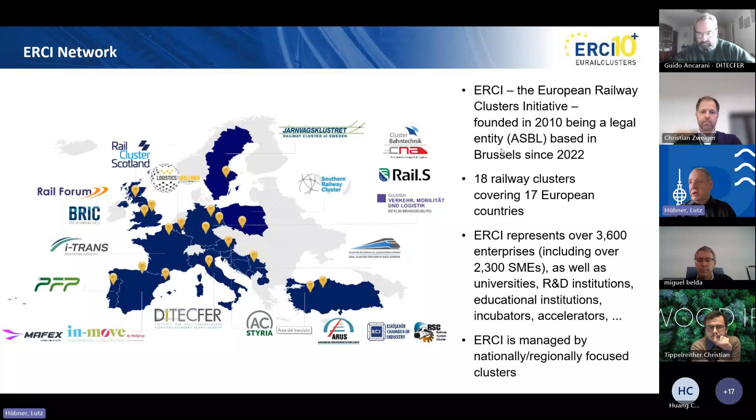Talking about the services of ERCI, mainly to the majority of the members of the ERCI clusters, which are small and medium-sized enterprises, there is the partner matchmaking in research and development activities, exploring new market opportunities also outside the own region within Europe but also outside Europe, enhancing visibility on international level, and discussing innovative topics which may have an impact on the development of the future rail system, like cybersecurity, multimodal and logistics, green and sustainable mobility, human factors, and so on. ERCI is also giving some networking opportunities, for instance due to one of the webinar series, and this is one webinar of that series.

Normally we have at least one webinar a month. We are also preparing and conducting workshops and networking events. We are present at fairs and organizing business clubs. The yearly event of ERCI is the annual ERCI Innovation Awards, a competition where every member cluster can nominate up to 3 applications to the European contest, and the next awarding ceremony will take place in 2025 during the Expo Ferroviaria in Milano.

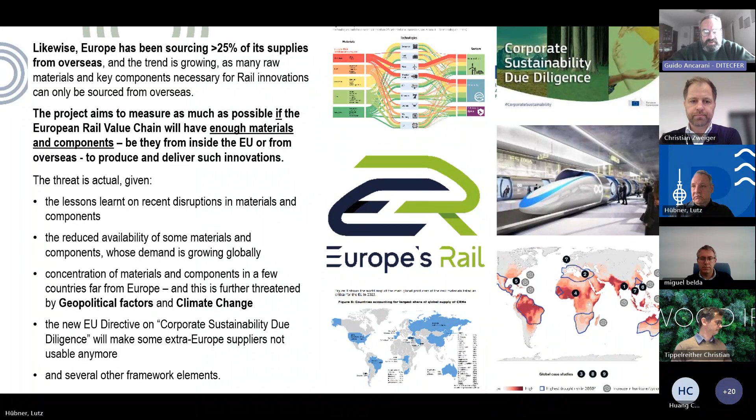So in order to face this, we have proposed to Europe's Rail a project, Leader 2030, coordinated by ERCI, using the 18 clusters on the field, knowing which problems come from the rail supply chain locally, and being able to face those problems and try to find solutions in terms of disruption and try to avoid them.

The composition of this project is 4 partners: ERCI, as I've said, but also Railenium, the technological center in France, JKZ, the cluster in Saxony, the cluster of mining, and Technopark Istanbul, able to help us defining the needs from other sectors in order to understand where and how rail is positioned in this problem. So we have 5 work packages in our project.

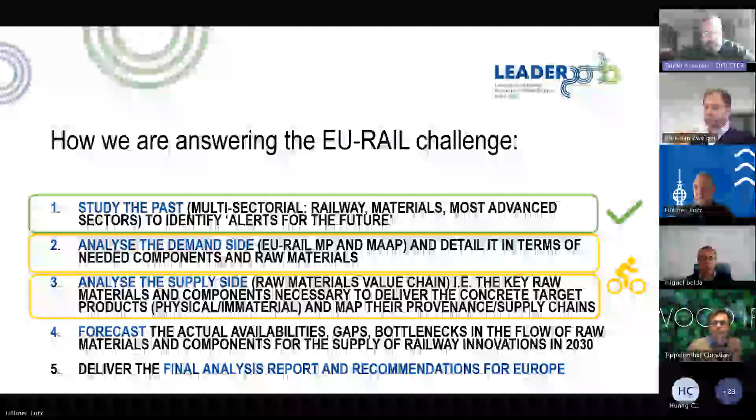Just to give 2 examples of what we are dealing with: one is additive manufacturing, certainly already ongoing, not something new, but a way to become a bit more autonomous in the manufacturing of product, subsystem or system. And the other is composite. Certainly, substitution of material is another way to be more resilient.

This ends the presentation on Leader 2030. I invite you, as you have seen already in the chat, the connection, or you will see it. In the chat you will see the way to reach us in order to have some contribution or to continue the discussion on this project.

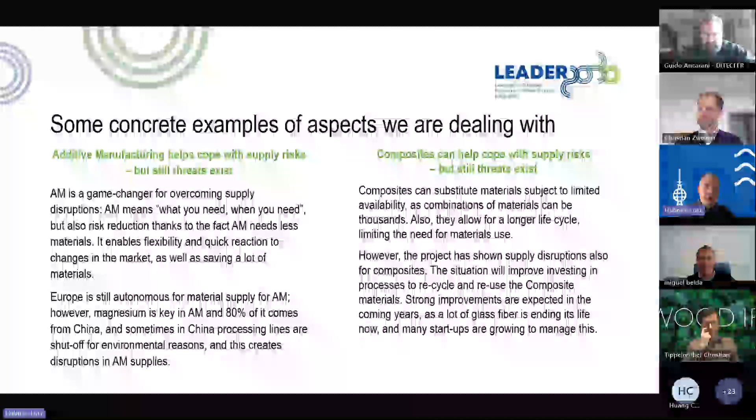Thank you, Guido, for this interesting presentation of the LEADER 2030 project. I will immediately hand over to my colleague Christian Zweiger from AC Styria. He has the task to introduce the first presenter.

Thank you, Lutz. Thank you for having me. Christian Zweiger, representative of AC Styria Mobility Cluster, one of the 18 clusters Lutz mentioned in his introduction. I am proud and happy to introduce Christian Tippelreither of Weitzer Wood Solutions, a long-term, mostly R&D partner of ours concerning automotive, but as might be interesting for most of you, also rail systems. Without further ado, I'd like to hand over to Christian. Lutz, thank you very much.

Good morning, everybody. Thanks to be here, and I'm glad to present our company and our technology to you all over Europe in the railway sector. Lutz, I think I can share my presentation. Yes, perfect, it's now working. Thanks everybody for being here and to present our technology.

In the previous statements, we also mentioned some points regarding sustainability, and I see some wording also regarding wood as a raw material for new applications. This makes me very happy, because we from Weitzer Group, a traditional wood company, have in our mindset committed to find answers made out of wood.

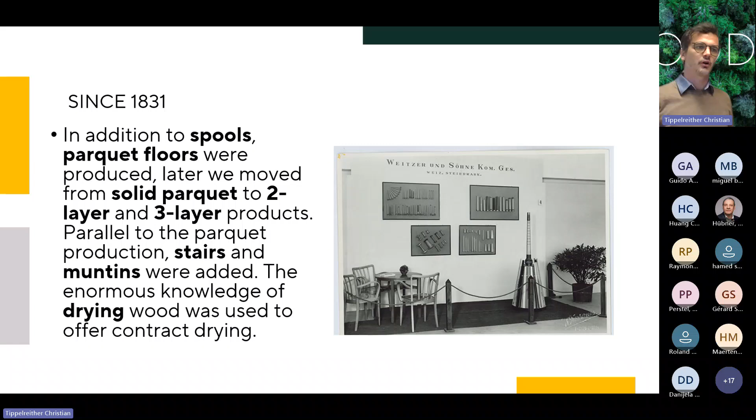And with this knowledge, with this very huge backbone behind us, we now look very close at what we can do with wood in a new way.

In our mindset, the raw material has a broad variety and a broad benefit, especially in Europe. Maybe one of you knows the CO2 storage of 1 cubic meter of wood is about 1 ton of CO2. So it's quite a big amount when you use wood in applications to store the CO2 in the product, whether it's in building, a mobility part, or something else.

Especially when we look at our region here in Austria, or even in Germany, Switzerland, Italy, Spain, the Scandinavian area or the Eastern area—everywhere in Europe, wood is rich in the region. It's there, and we say it's one of the only really renewable materials with a very huge amount of material in our industry area here. So we see it as a quite big advantage for the European industry to use wood, because we know what we can do with it.

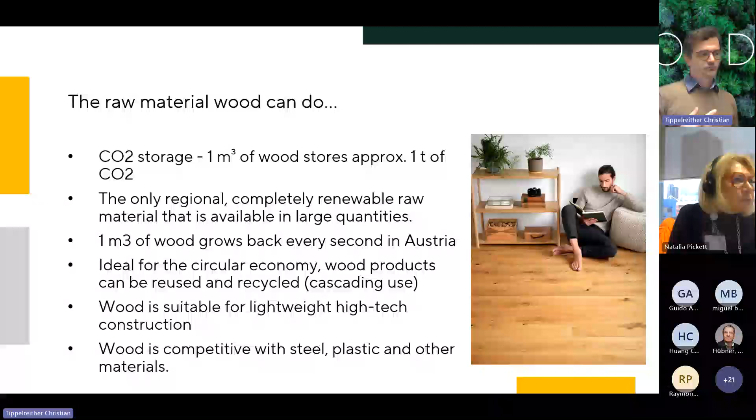We know the industrialization part, and we have the material as a renewable material in our region. Especially in Austria, 1 cubic meter of wood grows back every second. So it's ideal for using in circularity usages—can be reused or recycled in a cascade usage—and is also very good in sustainable lightweight material and lightweight solutions. I'll explain what I mean by this afterwards.

As Weitzer Wood Solutions, you see here an impressive amount from our side—we are committed to finding answers out of wood, especially with the technology of pressing it in molds, pressing 3D layers or form parts out of veneers. So the challenge we have in Austria is that we are in a big transformation phase.

When we look over Europe, we now have the chance to transform our businesses from fossil-based products and fossil-based solutions—whether fuels, materials or something else—into green business solutions, into circularity solutions, to recycle the products, to make the energy usable from the sustainable part, but also the materials we have in a sustainable way for new business drivers.

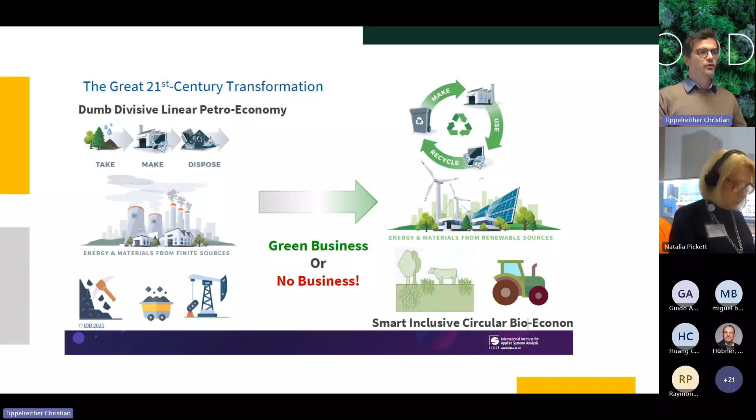And that's the reason why we are really focusing on our path to be an engineering and manufacturing company. We say it's for wooden hybrid components. Wooden hybrid components means we combine different wood species together to create a hybrid product, or we combine different materials together with wood—whether plastic materials, steel, or something else. So we have technologies to combine different materials with wood and to make the best out of each material.

Therefore, we deliver a 5-phase process where we start with the customer in the engineering phase to find new ways, new solutions, and bring it to a producible part—to industrialize the part and produce it up to 1,000, 10,000, or 50,000 pieces every year. In this way, we are certified with ISO 9001, but also 27001, and also quite familiar with certificates regarding burning issues and so on.

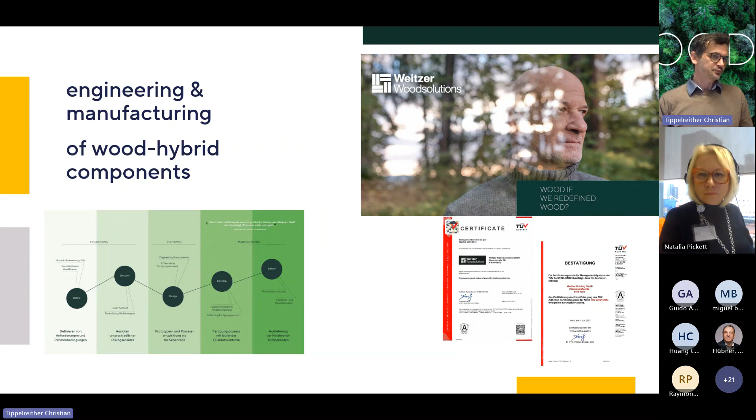For us, it's really important to find new ways in designing with wood. Wood is a high-tech material. Wood itself is a composite material, a natural composite material out of cellulose, lignin, and hemicellulose. So I have a fiber with the cellulose, and also a matrix material with lignin, and a gluing system with the hemicellulose.

So when we use this wood as a design material to find new ways, new ways regarding material databases, to simulate this and bring sustainable design solutions with the backbone of the data simulation part, it brings new engineered solutions and results in customized, optimized wooden composites for the whole industry.

The main backbone behind this technology for us is the point of predictability. In our research program, we worked really closely together with different partners from industry and also from the research point of view—the TU Graz, the BOKU in Vienna, or the Virtual Vehicle in Graz, which are our simulation experts in this case. And we found a way to make wood as a material predictable in a finite element modeling system in our simulation programs.

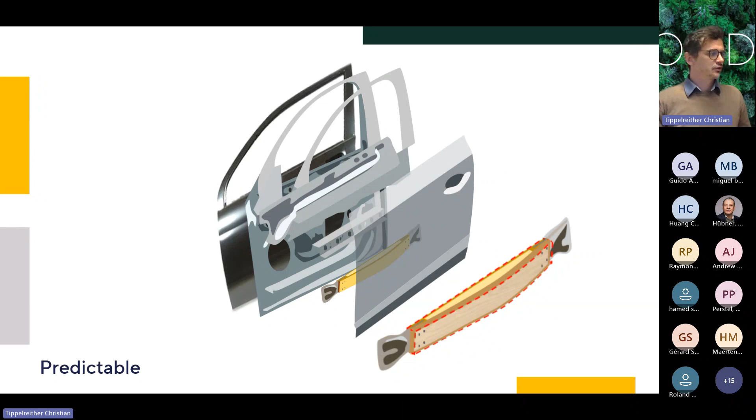With different use cases here, shown as a side impact beam in a car, we delivered the whole system from the simulation models, the digital simulation point of a product. Here in this case, it's a side impact beam from a car, and we make sure that this simulation part, these simulation programs, and the material data behind them function the same in reality as in the digital way.

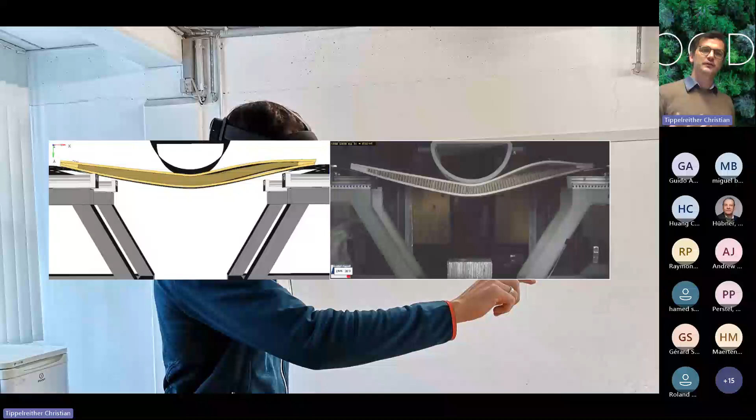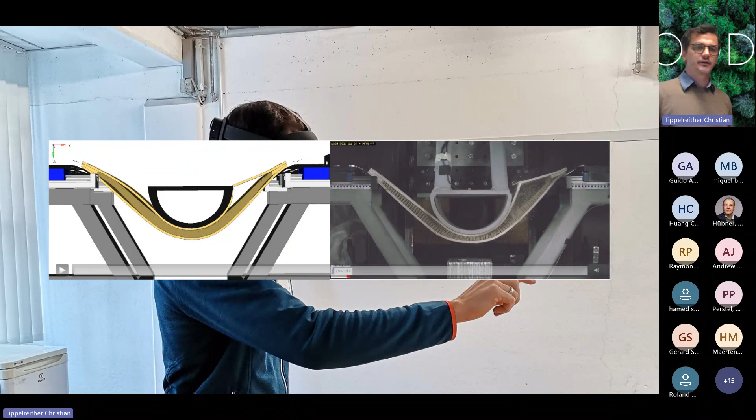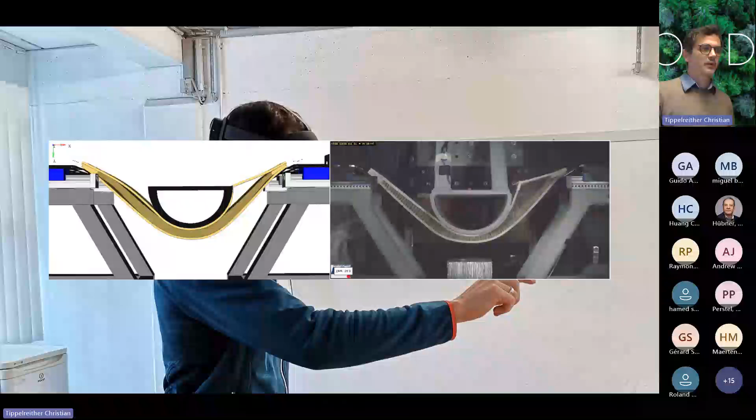That's the main game changer for us, that we're now able to bring crash-relevant simulations and crash-relevant material data to new applications, finding a way to optimize products that are generally steel profiles, small high-stiffness steel profiles, and build up natural-based solutions instead. That's why we always talk about producing lightweight parts out of wood.

That's also a bit of the explanation regarding the theory, when you look at some Ashby maps comparing density to stiffness. Technical experts know ceramics, metals, or composite materials are quite high regarding stiffness. Natural products have a quite broad variety regarding stiffness and density, but when you look at wood with a zero fiber angle, it has quite good performance regarding stiffness compared to density, because of much lower density compared to other products.

When we use this benefit of the zero fiber angle with good performance from the stiffness and strength point of view, and look at the detail level of which wood species fit best, birch or beech are quite good wood species for this veneer technology. Using thin veneer layers gives quite good stiffness and tensile strength with low density compared to other materials.

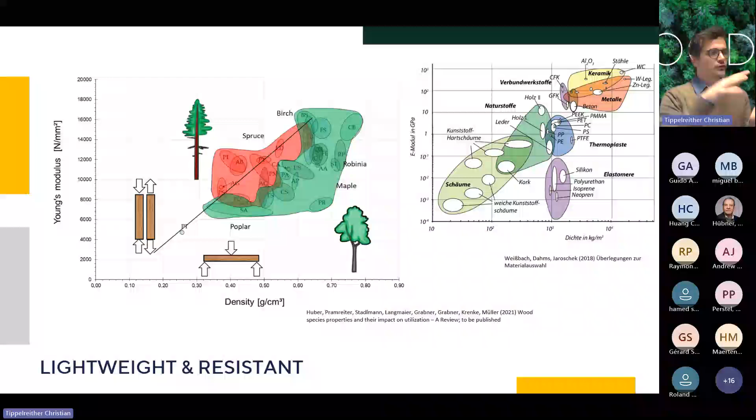That's the reason why in most of our product developments we achieve 10, 20, or sometimes up to 30% less weight, so we can produce lightweight components compared to glass fiber reinforced composite, or even aluminium or magnesium. We're on a good way to produce these 3D pressed parts, incorporating a resin system.

This resin system for gluing the thin veneers can be polyurethane, formaldehyde-based systems, bio-based systems, or even rubber-like with high flexibility. It mainly depends on the function which customer or product needs, especially in the railway sector, which is a big focus for us. Of course there are limitations regarding burning issues, but several resin systems work well, and we have certificates for some products.

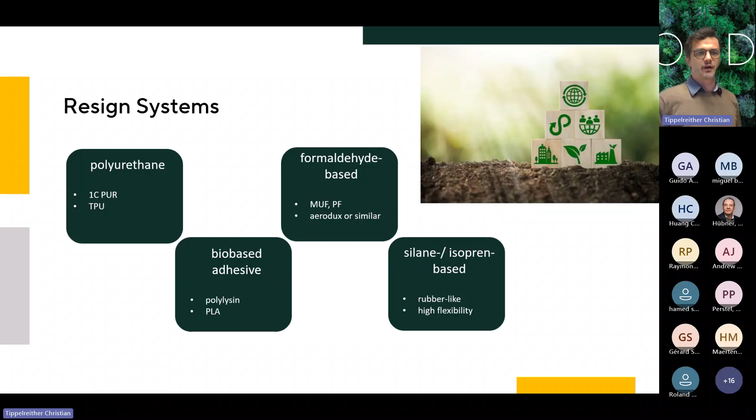For us, two digital processes are very important. On one hand, the digital engineering process, developing specifications with the customer, the functions of each product, setting up designs, simulation models, FEM simulations, and optimization loops. At this stage we also link to the production process regarding costs, setting up a cost perspective even within these optimization loops, finalizing first concepts for prototyping.

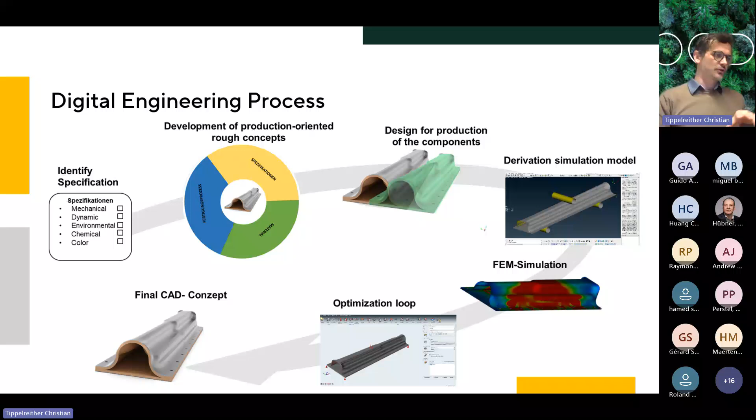Especially during optimization and design phases, the production process is very important to us - from raw material to product, understanding this function-oriented process control from the veneer layers, the gluing system, and optimizing fiber mats, if we use viscose fiber or similar to enlarge stiffness or strength of the parts. We bring digital product development and digital process development together in an optimized way.

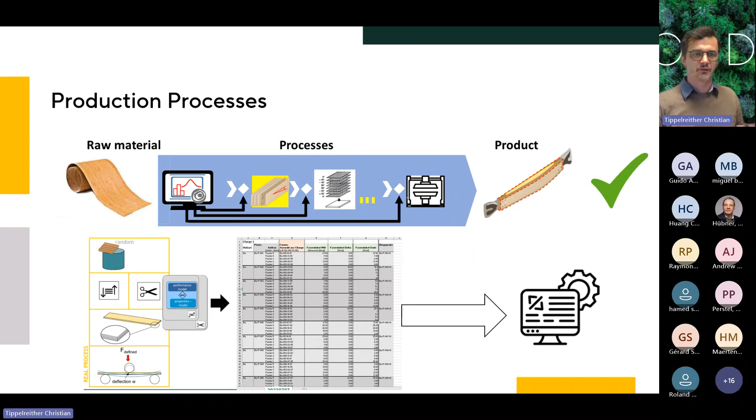We are even not allowed to talk about it, especially for the mobility sector, but this shows us the point that with use of wood, you can get a highly optimized part regarding weight, and also optimize the CO2 equivalent in your whole product, in your company, and store this CO2 in wood products.

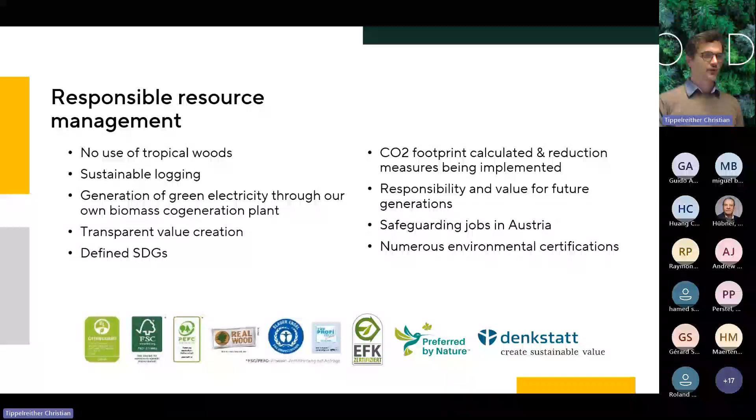In general, when we look at the mass timber species and the main sourcing of the companies, we look at it in Austria and also in Germany. But here in Austria, for example, the forest in general is changing from spruce to maybe more beech or also birch wooden species. So this is the reason why we also look at this, I would say old, but for the usage new, wooden species regarding beech and birch for these veneer production fields.

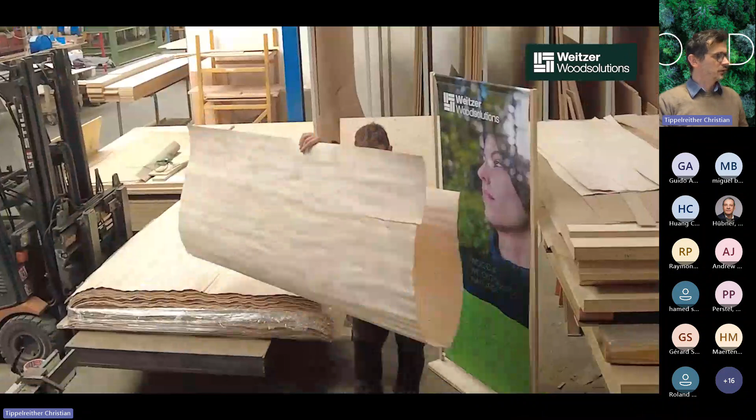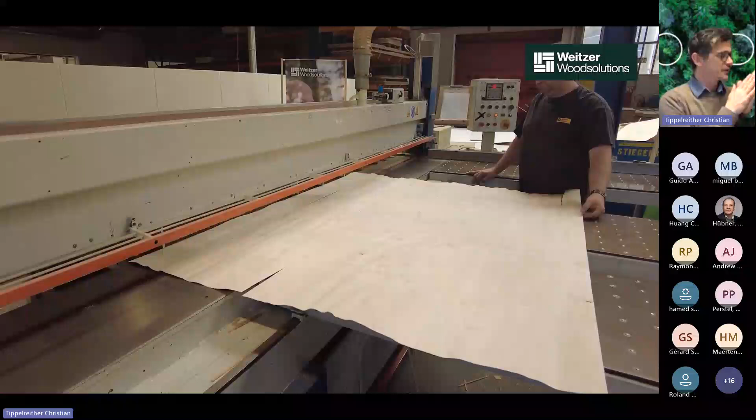Now, hopefully this works, a small video on the manufacturing, handmade working processes, how we use thin veneer layers, cutting these thin veneer layers, similar to carbon fiber production where you have a pre-preg. We have these thin veneer layers which are glued with different resin systems, and these glued thin layers are stacked together depending on the whole simulation model of what we need. It's similar to carbon production.

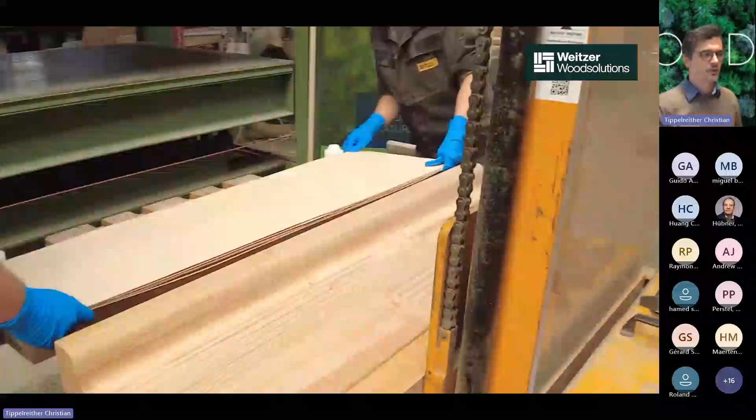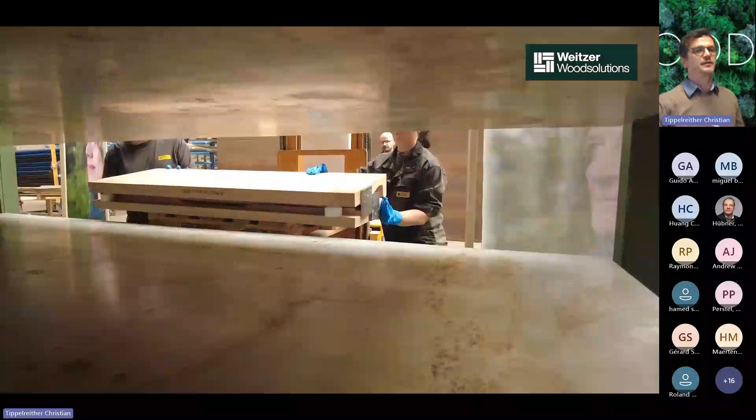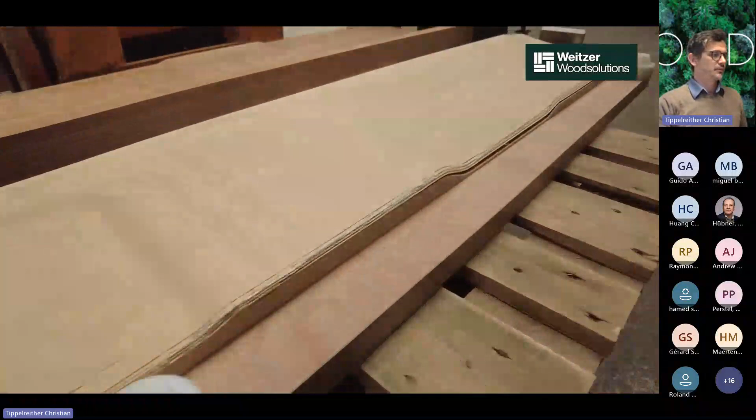You also have different layups, from 0, 90, or 45-degree layups with different pre-preg stiffnesses, and it's the same here, only with wooden veneer layers we use 1 millimeter in thickness or 1.5 millimeters, or thinner if needed. We press it in a pressed mold, depending of course on which glue you need, and then it's demolded. Then you have, as you see here, a complete pressed part in a 3D layer shape, as needed for our customer, for our purpose, and so on. Then it's quite similar to any other product.

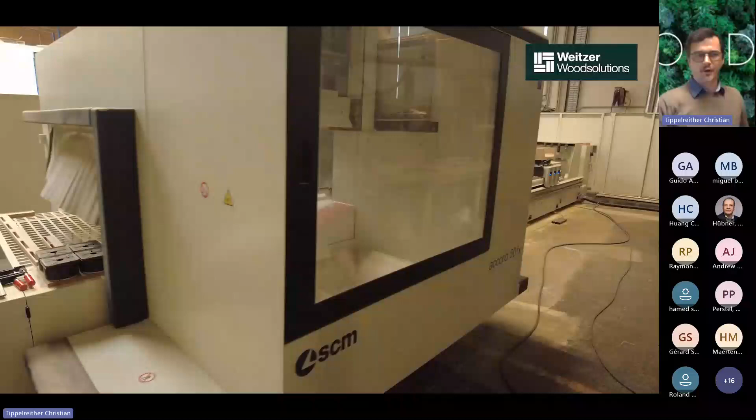You need a milling system. Of course, we use a 5-axis CNC milling system here, one of ours. We have several. We take out the CNC, do the mechanical preparation of the part, and work. That should show you, on a basic level, the handcrafted process. Of course, we are now in a much bigger industrialized process, but this shows the way we are working.

These are our sectors. We are really focusing on the railway sector with a really good partnership with companies, also on the automotive sector. And in the middle, we have performance parts, like dynamic parts, as you see in a vertical wind turbine with rotor blades out of wood, or also some wall box cases where we substitute some plastic materials.

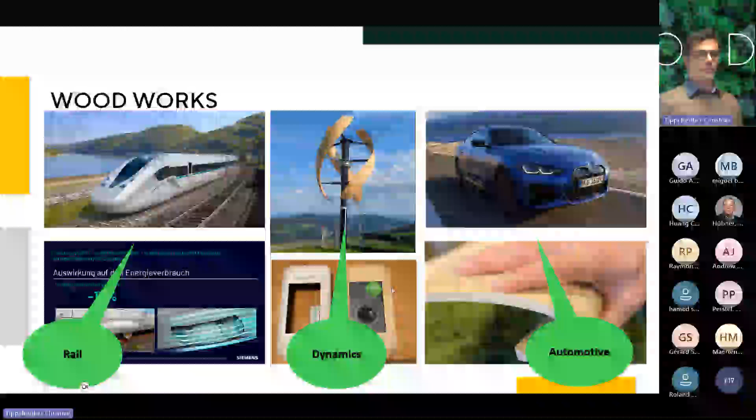Now I would focus a little bit on our famous railway part we have. So here we're quite famous that we can talk a little bit about our part with Siemens Mobility for the new high-speed train, the Velaro Novo.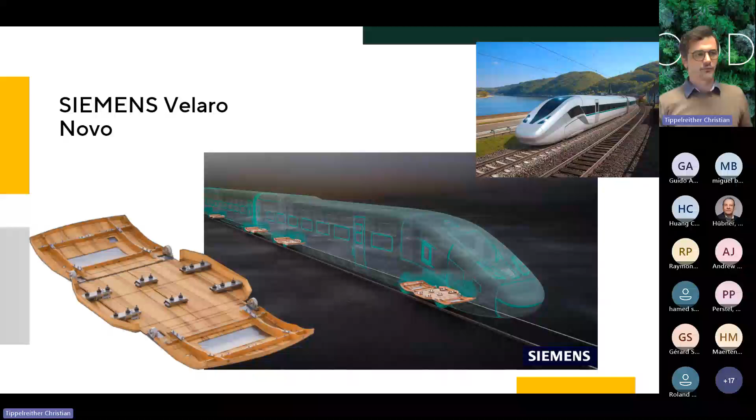Our partner Siemens worked really quite a long time regarding this aerodynamic chassis part of the train, the high-speed train, making also a material comparison regarding carbon as material, steel and aluminum, composite material, also aluminum, and our wooden parts. So we developed here some new fields with our wood parts.

We developed a whole panel, a 3D pressed panel with a system to enlarge the stiffness behind that. We optimized with this part the whole pressure and the whole energy consumption of the train. So when the train is driving up to 300 kilometers per hour, a lot of pressure comes up at the front part of this bogie, and this wooden part has to cover this whole energy too. With this part, with this aerodynamic dynamic part, the train can reduce the amount of energy consumption by up to 15%. It's really quite high.

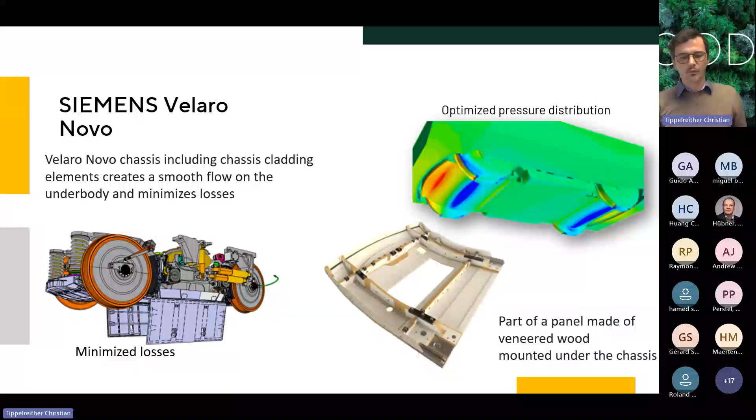Now we are really happy that we can hand over this part to series production and figure out a lot of performance points with the wood. So for us, wood is not only the reason to use it because it's sustainable. That's one of the reasons, of course, but we can also make wooden parts with very good performance. For example, regarding fire protection, we have a system that enables our wooden parts to meet EN 45545 HL2 standards, like this part.

We take a lot of ballistic tests for the rail sector, for the outside chassis parts. We take a lot of testing regarding long-term behaviors, up to 30 years in usage at the train, a lot of climate change testing and so on. Also regarding standard connection points, how to glue metal connection points with wood and so on. And there we get a lot of knowledge, and we are happy that we can bring this knowledge inside to other products, to other fields.

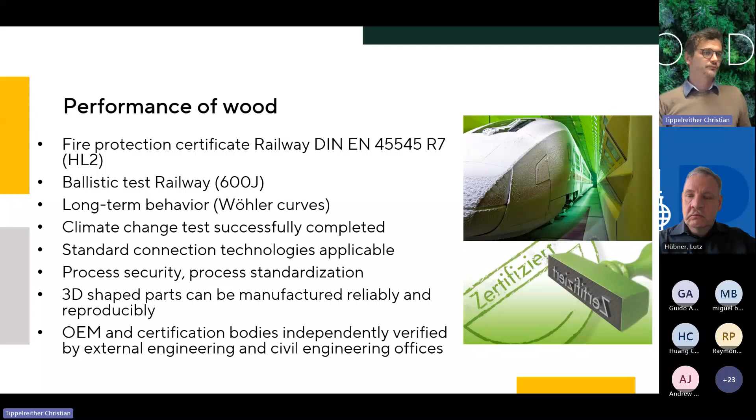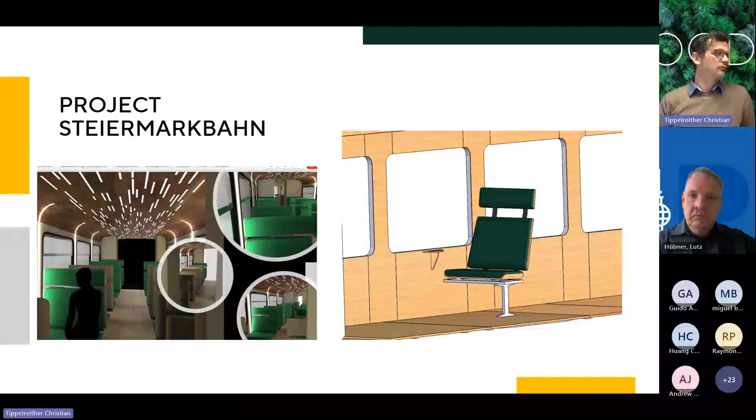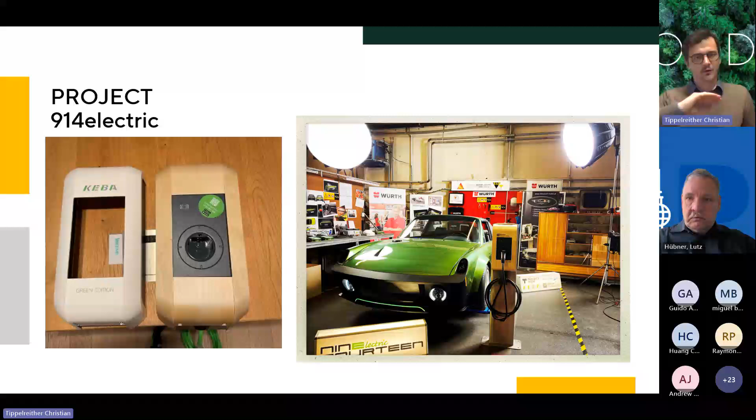Some parts also regarding a refurbishment of a company here in Austria with the project of the Steiermarkbahn, where they deliver the whole interior part at the ceiling levels, also with fire protected wooden pieces and so on. As you saw before, a project regarding the helix wind turbine rotor blades, also at outside conditions, or a project with the wall box, to substitute here a plastic part with a complete design cover out of wood, very thin, also with impressed veneer technology and so on.

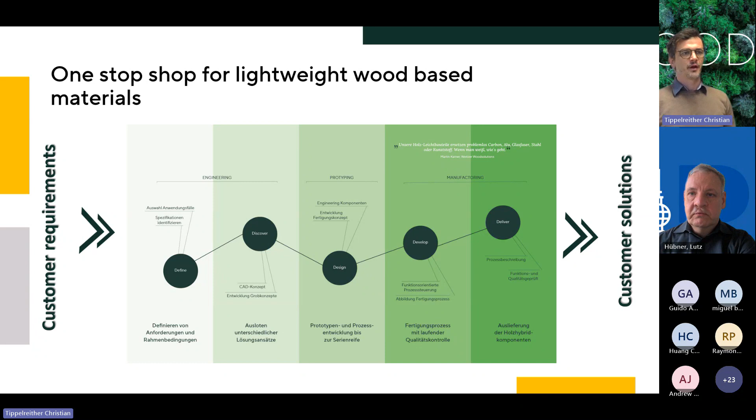And this is also the last slide from us. So an important message for me is: we could be a one-stop shop for lightweight wood-based materials, wood-based solutions for our customer. We really have the function, the customer requirements of a product, of a part, in mind, define a path, define the solution, and really manufacture parts up to thousands of pieces every year to fulfill the customer needs, the customer solutions, and hopefully we're quite happy to cooperate in future with more companies all over Europe. And from my side, I can say thank you. If you have some questions, actually or afterwards, please don't hesitate to contact me, or also Lutz or Christian Zweigler from the ERCI. Thank you very much.

The new point is, it's an old technology to press veneers in a mold, as you know it maybe from stairs and so on. That's not the new point. The new point is that we are now able to simulate it in a digital way, to optimize the structure to the really thinnest layup and the really high performance layup regarding weight and stiffness. So this is the newest point.

Second one: wood as a natural material has the behavior that it burns. How does it work with the regulations, with the fire protection, in the railway sector? I guess it is nearly the same question as the last one. Maybe we can combine this question for the use of wood in the bus. Do you comply with fire and smoke norms?

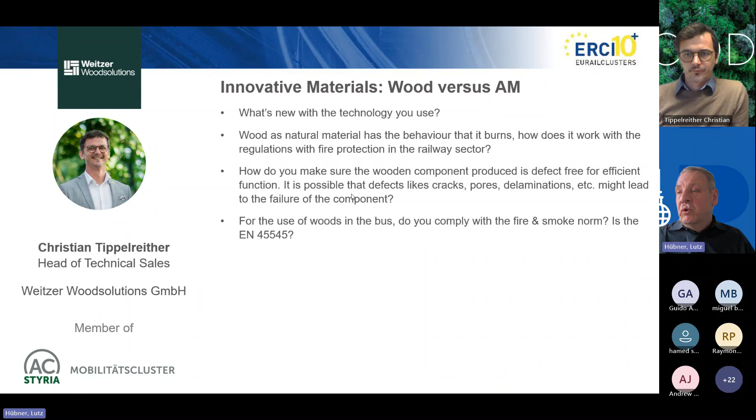We have some more questions. I'm coming to a general one, not directed to this presenter - as a general question, maybe we could discuss it afterward. As a maintainer and operator of railways, we focus on the end of life stage of trains rather than their construction. What best practices or innovative approaches would you recommend to ensure the decommissioning process is aligned with circular economy principles? Especially, how can we maximize material recovery, reuse, or recycling while minimizing environmental impact? Have you got an answer on this question?

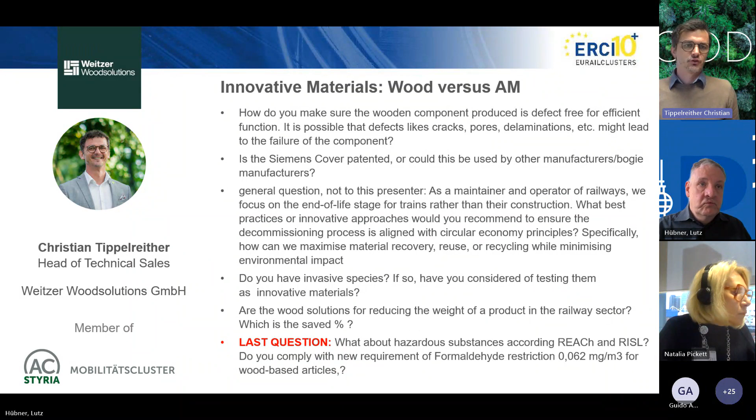Next one: are the wood solutions for reducing the weight of a product in the railway sector - what is the saved percentage? We can only look at the single piece or the product, and at the product level we can reduce it up to 10-20%. Of course it depends on how much of this product technology you use on your whole railway vehicle. But in general, when we substitute, for example, aluminium or steel, we can achieve a weight reduction up to this 20%.

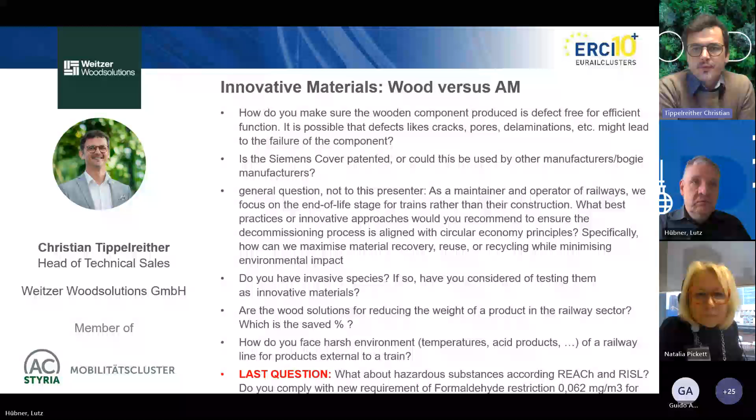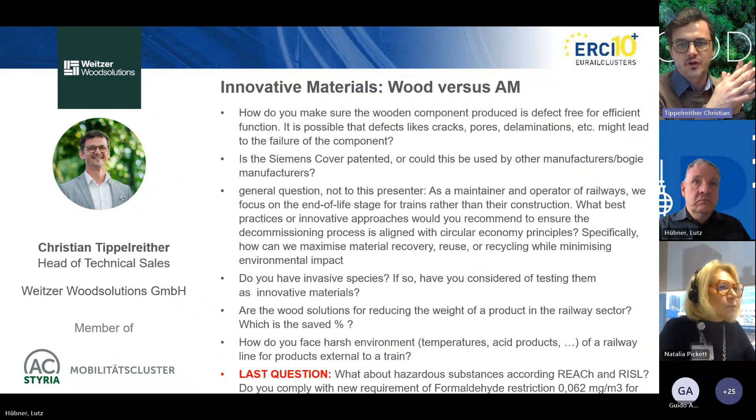So, two more questions. How do you face harsh environments, temperatures, acid products, and so on of a railway line for products external to a train? Temperature is not so much a problem for wood. Compared to steel, you have an enlargement of steel or other metals regarding temperature as a function. Wood has no problem with temperature, I would say up to 180, 200 degrees. They have no thermal extension with wood regarding metals, so this is not the problem.

The point with wood is also the moisture, and for the moisture and other fluids, we have to protect the wood with coating systems and the coating behavior. I think we have actually 50 or 70 different coating systems in our field, and we take the right one of our systems for the right usage with the wood.

Looking at the second question on this slide, I'm not sure whether we have already answered this: Is the Siemens cover patented, or could this be used by other manufacturers, other bogie manufacturers? This we have discussed with Siemens.

So now the last question: What about hazardous substances according to REACH, and do you comply with the new requirement of formaldehyde restriction for wood-based articles? Actually, formaldehyde restriction is not so much a point for us, because we use polyurethane gluing systems especially, not formaldehyde-based systems, for the railway sector. But in general, from the wooden technology point of view, the formaldehyde restriction is mainly a point with particle board, because there the amount of glue is much higher than when we use our veneer technology. But if you have detailed questions regarding this, we can discuss later on.

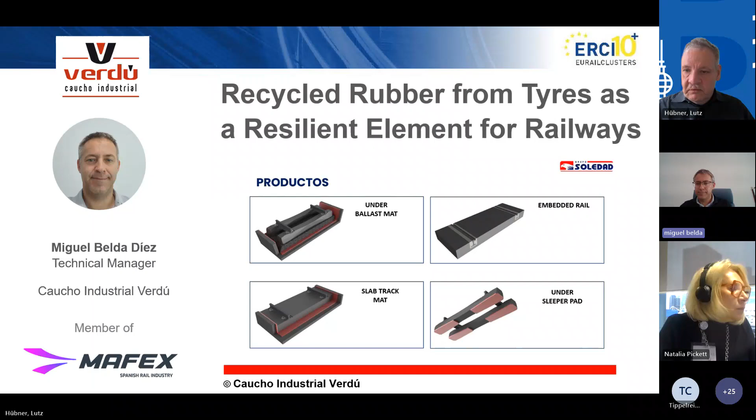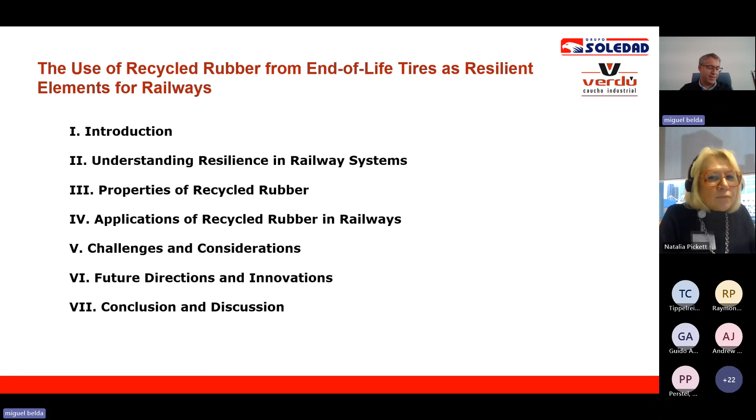Thank you and welcome to this explanation of how we can recycle rubber from end-of-life tires as resilient components in railway infrastructure. Today, we will discuss innovative and sustainable solutions that can help the railway industry reduce its environmental impact while enhancing the performance of critical infrastructure components.

This class will provide an overview of the importance of sustainability in the railway sector and how materials like recycled rubber can be used to improve the resilience and longevity of railway systems. As global awareness of environmental issues grows, industries across the world, including transportation, are seeking ways to reduce their carbon footprint and optimize resource use.

The railway industry, a vital part of global transportation, faces challenges related to aging infrastructure, increasing demands for capacity, and sustainability. Recycled rubber, particularly from end-of-life tires, is one such material that can contribute to meeting this challenge. It offers enhanced performance properties such as vibration damping, noise reduction, and increased durability, which are essential for maintaining and improving railway systems.

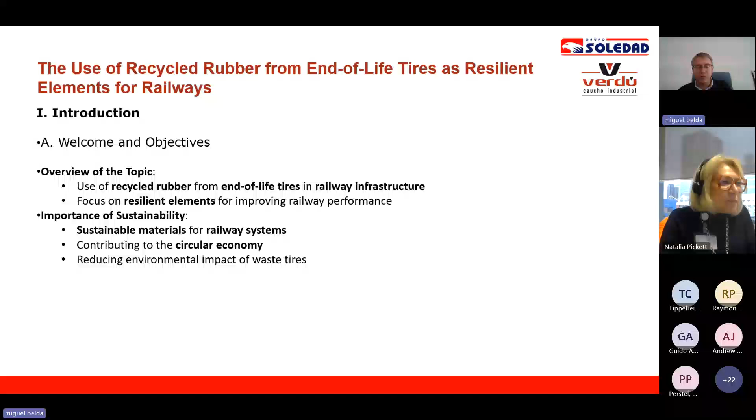This is important because the key point with this material is vibration damping and noise reduction. It's very important, and we are going to discuss this largely during the speech.

Okay, a brief introduction about rubber recycling. Recycled rubber refers to rubber materials that have been collected, processed, and repurposed for new applications, typically once they are no longer suitable for their original use. The most significant source of recycled rubber is end-of-life tires.

This means that approximately 3 million tons of used tires are collected around the European Union, according to data from Eurostat. Of these 3 million tons, 50% are recycled. That means that we have 1.5 million tons of tires that are not being recycled nowadays in the European Union.

We are talking about a lot of material that presents a very big problem in terms of waste, because chemically the end-of-life tire is a very unpleasant material, as there is no chemical back reaction. So you have to try to find how to ensure that this end-of-life tire can be recycled.

Now, the European Union is working to increase this 50% recycling rate, because these rubbers are incorporated into asphalts, construction materials, and of course railway infrastructure.

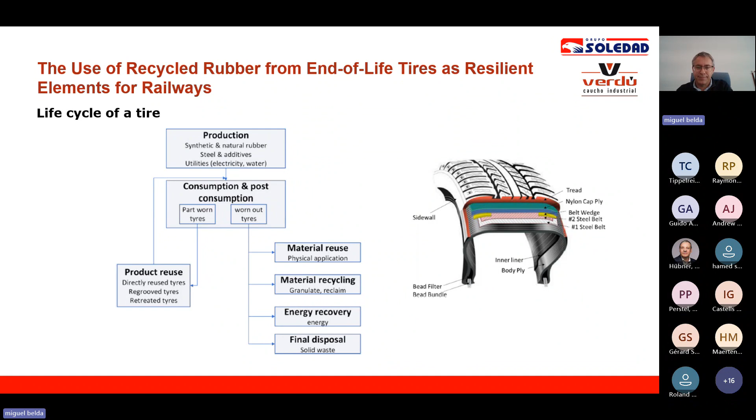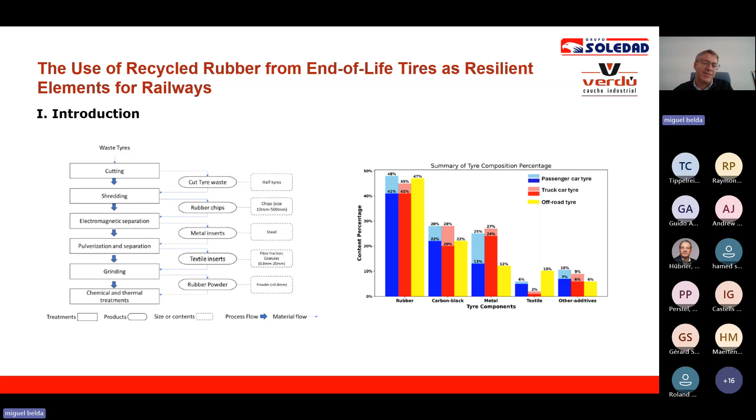Now we are going to focus our speech on resilience against vibrations. Why are we talking about rubber? Because in the railway sector, rubber is a material that can be used to reduce vibrations.

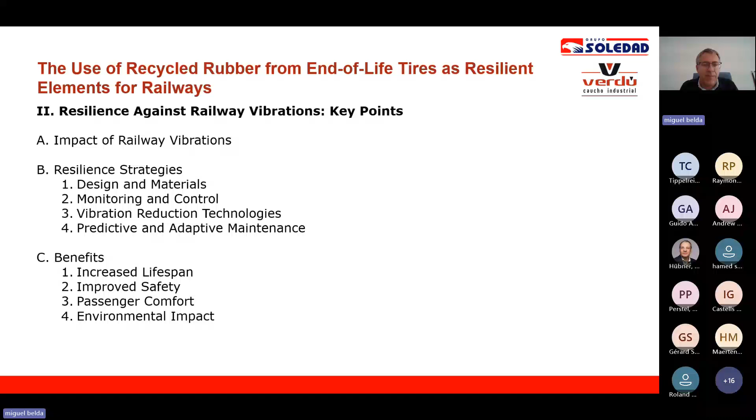Railway vibrations are an inherent phenomenon in rail transport, especially when trains operate at high speeds or when infrastructure is subjected to intensive use. These vibrations can have various negative effects on infrastructure, safety, and passenger comfort. Resilience against this vibration involves designing, maintaining, and operating railway systems in ways that minimize, mitigate, and adapt to the effects of vibrations, ensuring long-term functionality and reducing associated risk.

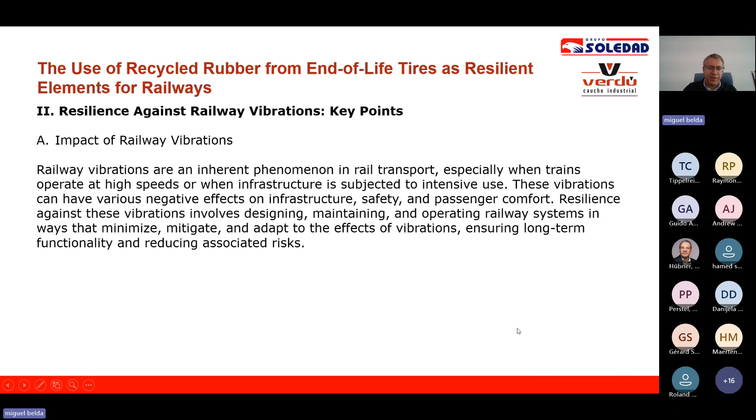What I mean is that resilience in terms of vibration attenuation will be very important in our speech, because with the use of recycled rubber materials, we can reduce this vibration and give more comfort, more long life, and structural integrity to avoid structural damage in the infrastructure.

So the vibrations are a key point in this speech, and are very harmful in terms of infrastructure for railway applications. It's not so much that it's going to affect the buildings themselves, but mainly it affects the comfort of the passengers and of the people that live near the railway lines.

It's interesting that the vibrations generated by passing trains affect various parts of the railway structure. First of all is track wear. Constant vibrations contribute to wear and tear of the tracks. Vibrations are not good for the tracks because, although they support them, they withstand a lot of very short but sometimes very strong efforts. So it's important to control these efforts.

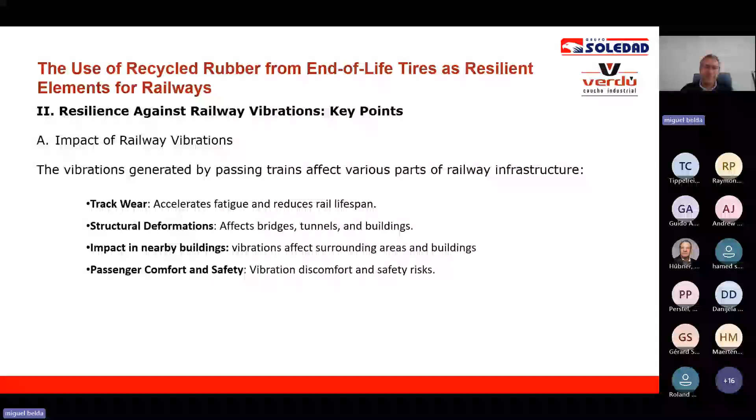And finally, of course, passenger comfort and safety. You will travel more comfortably if you have good resilience in the railway lines. Okay, then how can we face these vibrations?

First of all, in terms of design and materials. Design and materials is a key point. You have to design the infrastructure to get a resilient track. All the people involved in designing know that resilience is very important, so they try to design the tracks to reduce vibrations. But sometimes it's not easy only by design.

So you need to add vibration isolation, for example rubber pads or damping systems. Here is where Caucho Verdú is going to show you that we can reduce the vibration that designers can't handle with the design of the structure alone. And finally, a flexible structure.

So we have to monitor and control the vibrations. It's important that, for improving this attenuation, we must put vibration sensors and predictive models to try to avoid vibration in the structure. Then, which kind of vibration reduction technology do we have?

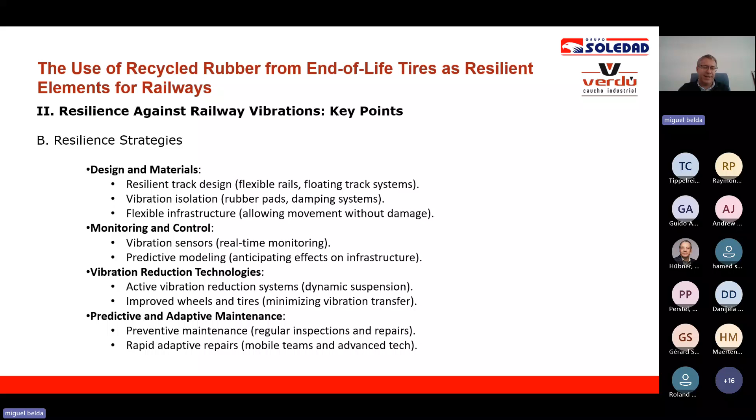And finally, predictive and adaptive maintenance. All governments and operators should have preventive maintenance. If you build a new railway line, you should maintain this line in order to prevent the worsening of vibration and the discomfort of passengers and people who live around the line.

Well, which are the benefits of reducing vibrations in railway? First of all, we increase the lifespan, we extend the infrastructure life, and reduce costs. That means that at the beginning it's more expensive to implement these resilience strategies, but with the years it will be cheaper.

All operators and governments should check this, should have this in mind, because it's not only the cost of building the infrastructure, it's the cost of the maintenance. So it's important, this point.

Second one is the safety. If you have a line, a tramway line, a railway in good condition with less vibration, you minimize risk of failures and accidents, of course.

Then the passenger comfort is important. When you travel by train, you want to be relaxed and want a comfortable journey. So it's important in this field.

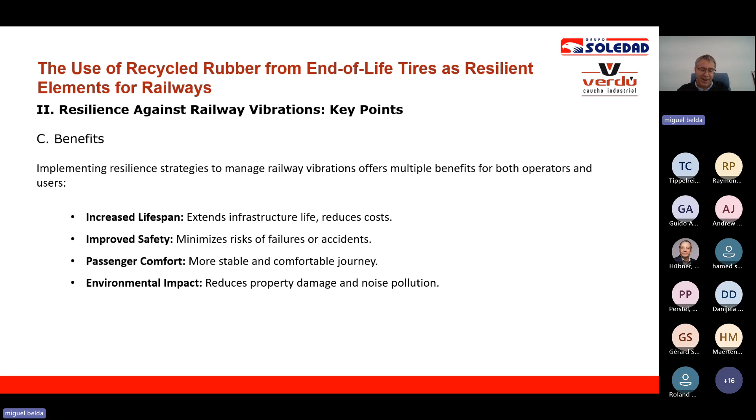And finally, environmental impacts. The noise and vibrations are very unpleasant for the people who live around the lines, and of course for those traveling on the railway.

So as a conclusion, resilience strategies ensure long-term functionality, safety, and sustainability of railway infrastructure against vibration. This will be the key point in this presentation, because we are going to focus on how we can reduce vibration in railway applications by using rubber materials from end-of-life tires.

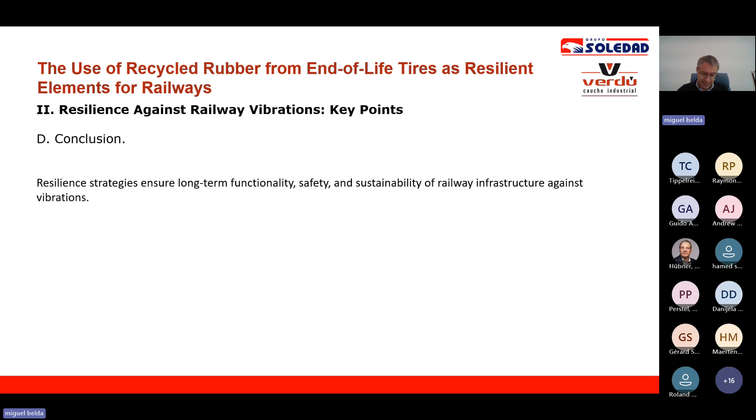So now we are going to focus on our material, the recycled rubber. Recycled rubber is a very exciting product, because as I told you before, recycling rubber from tires is very good rubber. Producers of tires like Michelin, Goodyear, Pirelli use the highest standards in the production of the rubber compounds.

So when the tire's life is finished, we take profit of these high properties of this compound. We clean the compound from steel and from textile, and we use the very good properties of this compound to avoid vibration from railway.

Recycled rubber can be obtained in three different ways. Granulated rubber is when we use directly the granulate from the mill, which we can add, for example, to the ballast. By adding small pieces of granulate rubber in the ballast, we reduce vibration and we can reduce the maintenance of the ballast.

The second one is the composite made of granulate rubber with a binder. This is the product where Verdú is a leader in the market, so we are going to focus the presentation on this product.

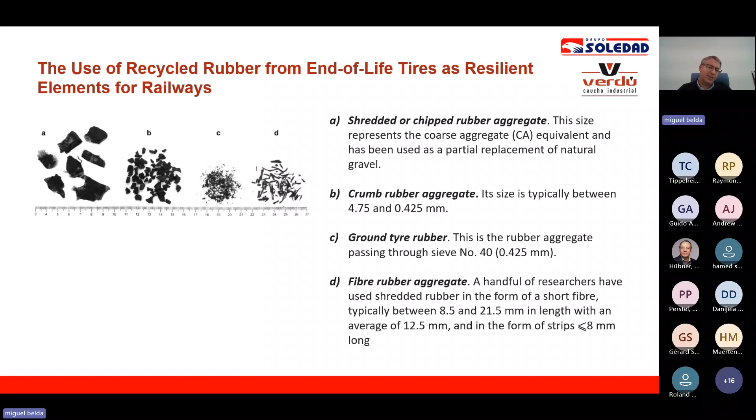C is the powder, which can be added to other rubber compounds. And finally, D is the chip, a long and very thick material that can be used in composites to give more tear resistance to the product. This is the key point in the composite made of recycled rubber.

Recycled rubber is mixed with a resin and then pressed, and in the microstructure of the product, on the right side, you can see there are a lot of air spaces, air cavities. Those air cavities are the key point of the performance of this material.

Air-filled cavities create a honeycomb structure, like different elastic spheres that can be deformed, and this space can be deformed along with the deformation of the rubber. So this is crucial for vibration damping and shock absorption.

Of course, rubber granulates maintain elasticity. So you can imagine a lot of very elastic spheres with very good properties, and in the middle some air cavities. This is the way the rubber composite is going to work.

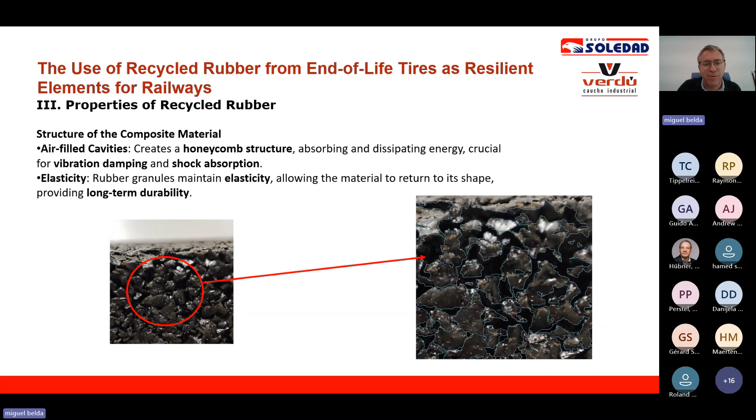The first property of the composite material is vibration damping. The air-filled cavities and the elastic nature of the composite allow it to effectively dampen vibration. This is especially valuable in railway applications where the constant movement of trains generates vibrations that can cause wear and tear on both the track and surrounding infrastructure. The composite absorbs these vibrations, so this is the product we are going to use for vibration.

Shock absorption is the same. The combination of rubber granulates and binder provides excellent shock absorbing properties. When forces such as an impact from a passing train are applied, the material absorbs and disperses the energy. This is important because we are not only avoiding vibrations, but also avoiding shock against the ballast. By using this material under the ballast or under the sleeper, we can reduce the vibrations in the structure. Vibration and shock absorption increase the life of the infrastructure.

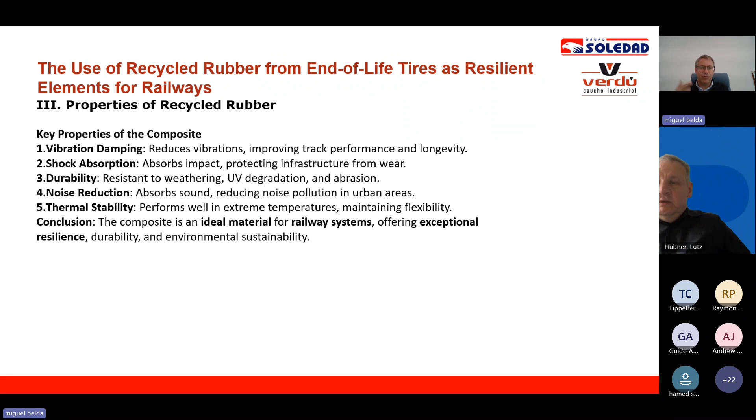Then durability - it's shown that the durability of rubber compounds, like this material, is higher than other resilient materials, as you will see at the end of the presentation. Noise reduction is also a key point; we're going to reduce noise through the use of these applications. And thermal stability - the rubber compound is very stable across the temperatures we use it in, from -20 or -30 to 40 degrees. This is the ideal material for railway systems, offering exceptional resilience, durability, and sustainability.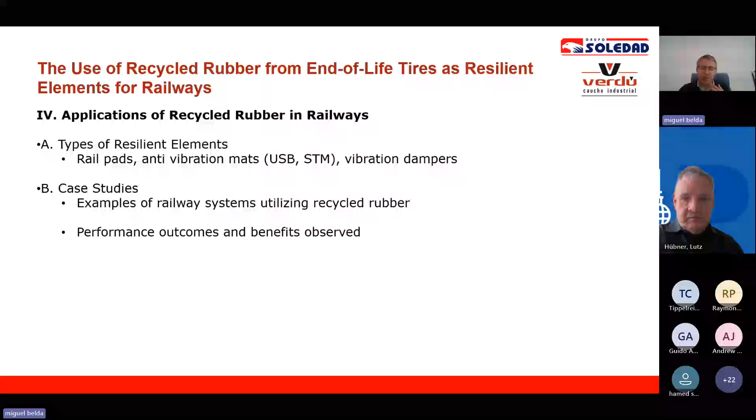So we're going to show you what kind of products we can produce to avoid vibrations and mitigate noise and shock. First of all, there is the under ballast mat, slab track mats, embedded systems, and the sleeper pads.

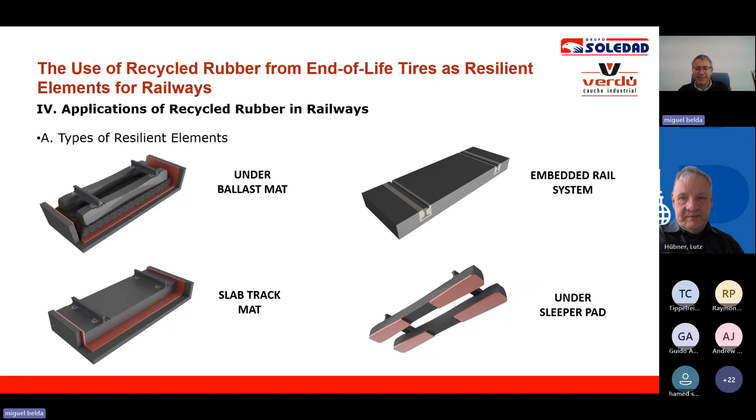First of all, the rail pads. The rail pad is the black sheet between the rail and the sleeper, and its function is to be placed between the rail and the sleeper and distribute the weight of the train. This is the first barrier to avoid vibration from the train.

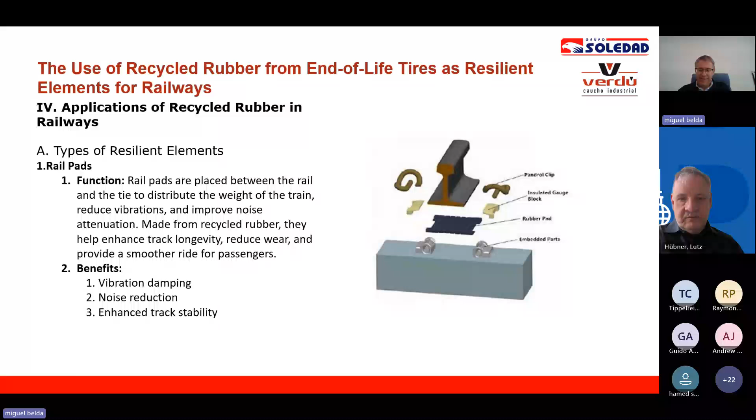Second are the anti-vibration mats. We have two different kinds. First is the under ballast mat, which is installed below and under the ballast in ballasted systems. As you can see in the picture, in blue, we put this mat to stabilize the track, prevent ballast displacement, and reduce vibrations.

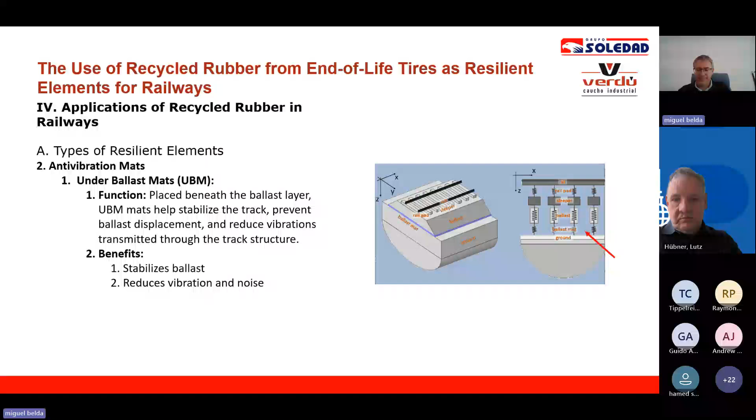These are some pictures showing how this material can be installed below the ballast. You can see that the ballast is protected and confined. When the ballast is confined, this protects the ballast. The format is in the shape of sheets or rolls.

The second type is the slab track mats. The slab track mat is the same as the under ballast mat, but it's installed below the ballastless track system. You can see the blue layer below - it's not ballast, it's a concrete slab. So we can install this product below the track in ballastless tracks.

It's the same principle: avoid vibrations, protect concrete, and improve passenger comfort. It's important because sometimes it's used to reduce the thickness of the concrete works. If you work with this kind of material, which is itself green, you can reduce the civil works and reduce the thickness of the concrete sheet. Sometimes designers ask us to help them design new tracks, reducing the thickness of the concrete, because in the end it will be better - greener in terms of using recycled materials and greener in terms of reducing civil works.

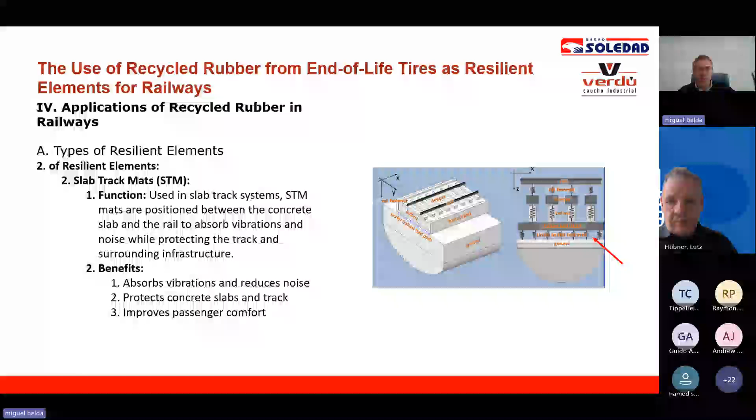The third product is the under sleeper pads. The under sleeper pad is a product placed under the sleepers. Under the sleepers, we can say it's the second barrier to reduce vibration - the first being the rail pad, the second being the under sleeper pad.

When you use this kind of material, you can improve shock absorption. It's important because when the train passes, the sleeper shocks against the ballast, which can break the ballast because concrete is shocking against stones. So by using this kind of product, you get shock absorption and reduce the direct forces from concrete to ballast.

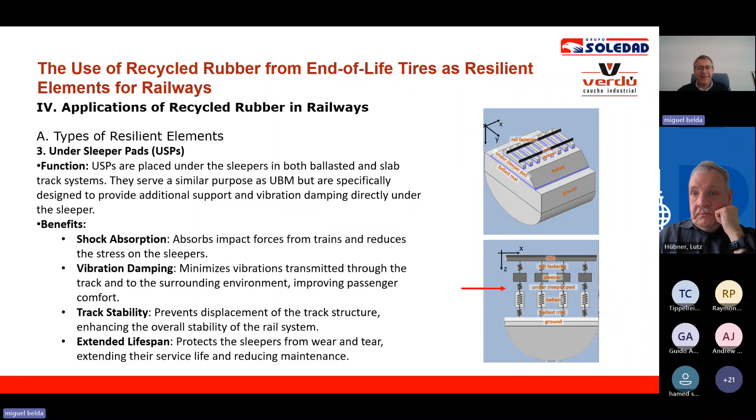So by using these products, you can get longer life in the infrastructure, and you can reduce the maintenance cost of the railway.

And finally, we have the other resilient element, the embedded rail system. This kind of product is used mainly in tramway, metro, and light trains when the rail is incorporated in the track. We use a covering of recycled rubber that, in this case, will be the first and only barrier from the train to the ground. By using this product, we reduce the vibration mainly in urban areas, because this is mainly for metro and tramway. So it's important.

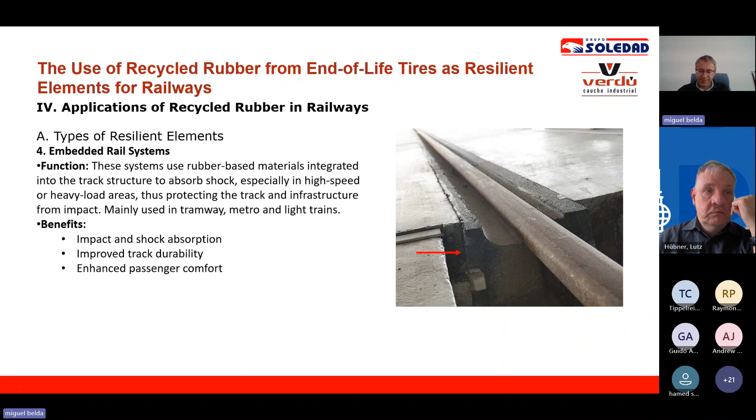Then a case of study. A case of study, we are going to talk about a real case in Spain. Spain is the second largest high-speed railway in the world. So the Spanish, we are very concerned about the vibrations, about the comfort of our high-speed train.

In this case, this is a new line, going to be finished next year. They had a problem because the line passes near a city called Navalmoral de la Mata. The railway passes so near at a very high speed, 290 kilometers per hour, so they decided to improve the countermeasures to avoid vibration.

In this case, they needed a decrease of vibration of 20 decibels at 63 Hz. The problem is that using one single material is not enough to reduce that, because there are some underpasses. So we studied the problem with them, and we advised them to use a double barrier of 20 millimeters each, in total 40 millimeters of anti-vibration mat.

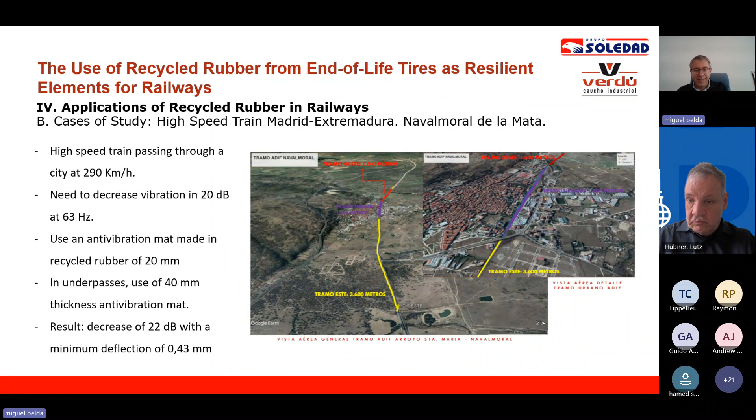So by using this material, we could reduce the vibrations, the noise, more than 20 decibels at the design speed. This is a real case of study, because by using recycled rubber, we can get a very good result in terms of attenuation.

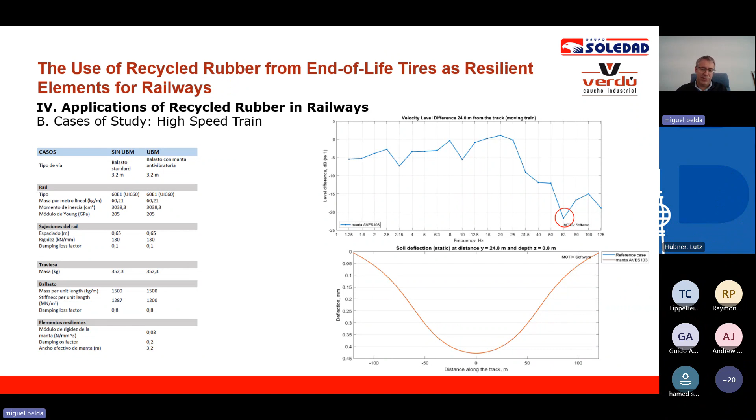May I ask you to finish your presentation? Yes, only half a minute.

If you compare our product, we know that some people don't want recycled rubber, but compared with other products, our material is better in those terms. It's true that it has less performance with fire resistance. Okay, that's all, thank you.

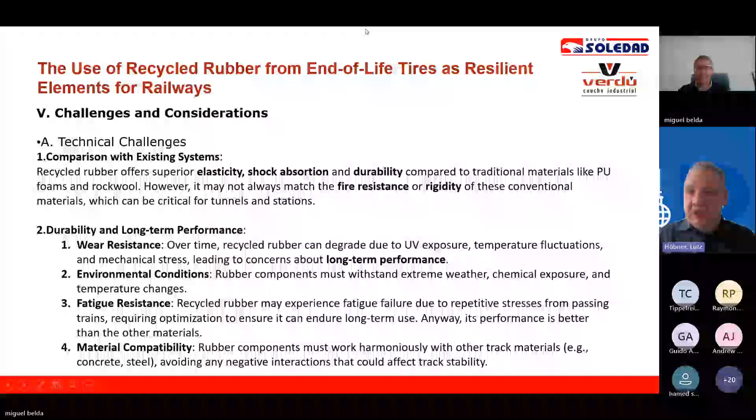Thank you, Miguel, for this interesting presentation. I guess we have a lot of questions as a result of your presentation, and I'll continue to share my screen. I'll try to start with the third question, because the first ones are pre-prepared, and this third one came directly from the audience.

How do you ensure the reliability of vibration sensors? I mean, how can we know how much small vibration amplitude could be detected? Do you follow the probability of detection concept?

Well, in this case, we know that the railway is going to cause vibrations. We are fighting against this vibration, we are not going to eliminate it 100%. Vibration sensors are important, but we have to ensure that the reduction is a real fact. Maybe I didn't understand the question fully, but I have to tell you that we cannot decrease the vibration 100%, but it can be measured if you measure the same railway with and without the countermeasure, with or without the resilient elements.